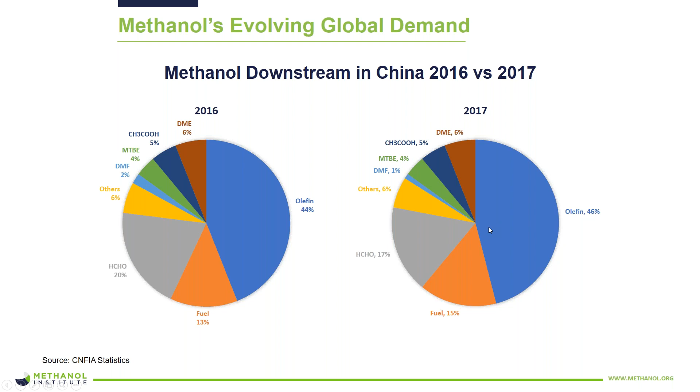Last year, China consumed about 70 million tons of methanol, which is a 13% increase over 2016. Olefins is the largest downstream, which accounts for 46%, and the second largest is fuel. If we consider all the fuel applications of direct fuel blending, DME, MTBE, as a whole, it accounts for 25% of the total consumption.

In the fuel applications, methanol as a direct fuel in gasoline blending, boilers and cook stoves is increasing rapidly in the past few years, which should have a promising future, and I will introduce in detail later today. While applications like formaldehyde, its market share in China is decreasing now, and the application of MTBE is also facing challenges from the Chinese E10 promotion policy nationally. That is why developing new downstream is important for all of the methanol industry.

Before this study, there was only very limited understanding about methanol fuel in the direct fuel category. Now, the development and discovery of methanol as a boiler and cook stove fuel also explains where the missing part of the methanol consumption in China goes in the statistics. Every year from past experience, around 7 million tons of methanol consumed in China did not have a specific downstream. So it's generally listed as a fuel or in the name of others. Now we have better understanding that the missing part of the consumption could be found in boilers and cook stoves.

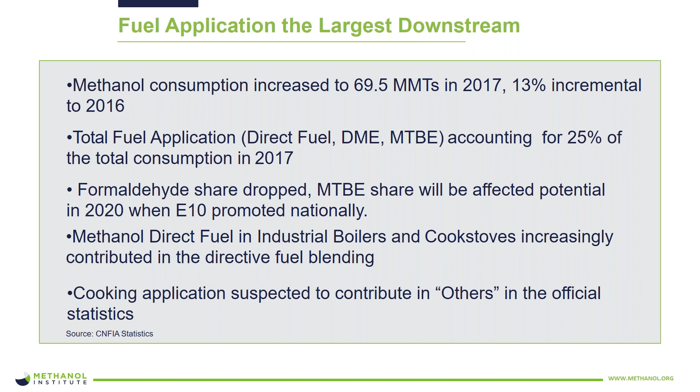Now let's move on to look at the boilers first. A methanol boiler is composed of a methanol storage tank, methanol supply systems like a high or day tank and a pump, a burner which is compatible with methanol fuel, and a boiler drum, which is similar to what can be seen in diesel or natural gas boilers.

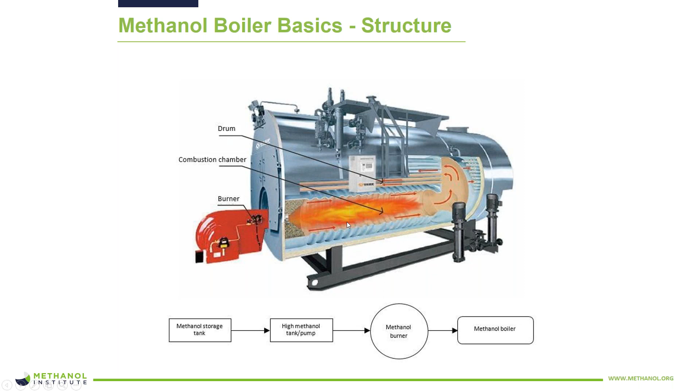An industry example can be found in a piano manufacturer in Tianjin, where a methanol boiler is used for heating and drying processes, in the right pictures. A large amount of the methanol fuel is stored in the underground storage tank outside the boiler room. When the boiler operates, the methanol fuel is pumped into the so-called high tank or day tank. Then the methanol fuel flows into the burner by gravity through the pump and the metering. Then it gets burnt to produce steam and hot water.

Now, many industries use them in applications for heat and steam, like food processing, pharmaceutical, and various manufacturing, with power range between 1 to 20 steam tons per hour. For the boiler power unit, China uses steam ton per hour to measure the output of the boiler, and 1 steam ton per hour is equivalent to 0.7 megawatts.

The fuel used in boilers can be neat methanol or methanol blends with methanol content over 60%. Generally, a 1 steam ton boiler consumes about 110 kilograms of neat methanol per hour. Such boilers can run 24 hours per day, 7 days a week. So the actual consumption can be very, very large. From our field investigation, we estimate that there were over 1,000 such methanol boilers in China last year, which consumed about 2 million tons of methanol.

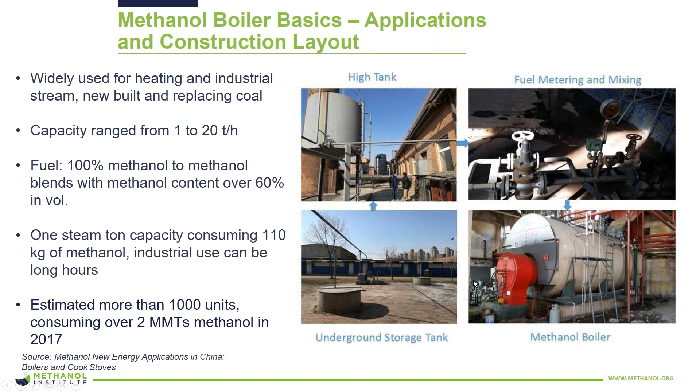This is largely due to the Chinese government's policy to ban coal in regions close to key and capital cities to prevent so-called smog weather, or the so-called blue sky protecting action. Most of the region is around Beijing in the north part of China and other key cities in the south part of China. Under such strict government policy, users do not have many choices. As we can see from the table, methanol and natural gas are the main choices used to replace dirty fuels like coal and diesel.

In the perspective of operational cost, I made two scenarios, low price and high price, for methanol and natural gas. The low price of methanol is the price found in the first half of last year. The low price of natural gas is the price for household purposes, which is government subsidized. The high prices are the prices observed last winter, when the coal banning policy resulted in methanol and LNG or natural gas prices reaching a very high record. The other prices of the fuel are average prices in the last year.

Through the calculations based on different heat values and thermal efficiency, we can get the actual fuel economics of different fuels in boilers. As we can see in the low price scenario, in the first and third column, methanol OPEX is slightly higher than natural gas. Such cases can be found in some regular conditions, like community heating. The natural gas prices, as I said, are government subsidized.

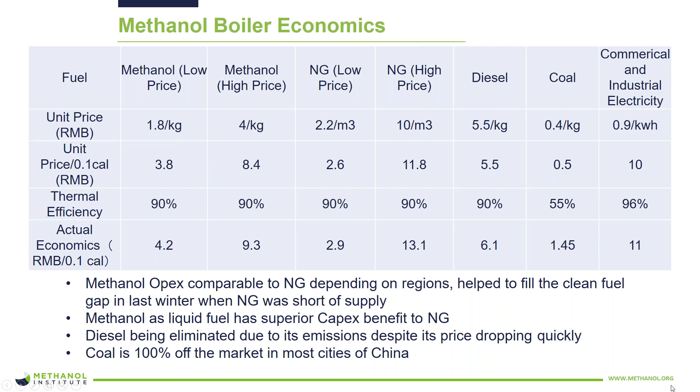But considering the capex, methanol is much cheaper than natural gas, either in the form of LNG infrastructure or the pipeline cost. In China, many companies cannot afford such infrastructure investment. If they don't use methanol, they probably need to close their business, forced by the environmental regulations. This explains why methanol has developed the market so quickly in the past 2 years, as coal and diesel cannot meet the required emission standard. Methanol is an economical and realistic choice.

From the emission point in this slide, as methanol does not have sulfur and gives better results on NOx and particulate matter (PM) emissions, either neat methanol, which is used in the LinJing boiler, or methanol blends used by the Jin Jing Da boiler, both show very good emission performance, meeting all the emission standards required by the Chinese government from the left columns, particularly meeting the latest Chinese emission standards, even in key regions like Beijing and Shanghai.

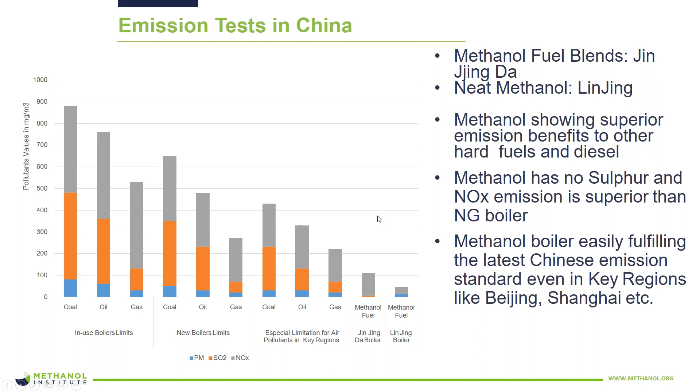It is also reported that methanol boilers have better NOx emissions than natural gas, probably due to the lower temperature in the combustion and less air intake. Now, the Chinese government is also looking at methanol boilers in a positive way. For example, the Ministry of Environmental Protection confirmed the emission standard of methanol boilers at the end of 2015 when methanol boilers were first introduced in Hebei province.

Previously, methanol boilers were only classified in the oil or gas categories in the Chinese boiler burner national standards. When updating the burner standards last year, the Boiler Burner Authority included methanol fuel and classified it in the liquid fuel category, with requirements on original emissions and design specifications. And this standard is to be effective by the end of this year.

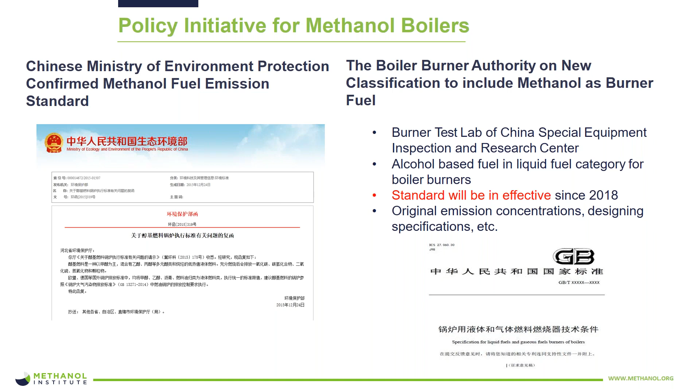Before this, a methanol boiler needed to be first certified as an oil or gas boiler, and then retrofitted to be compatible with methanol fuel. With these standards, the methanol boiler is a regular product, same as natural gas and diesel, which can be certified by the local authority. However, a boiler is related to many standards. The standards above are not enough.

From the fuel perspective, more work is underway as these new markets need standards to form safe practice. By using standards, methanol boiler technology can be trusted by the government from a regulation and inspection perspective, also reducing consumers' concerns on safety. Now, the China Association of Alcohol and Ether Fuels and Automobiles, also called CAEFA, is leading another two group standards drafting under the China Petroleum and Chemical Industry Federation, CPCIF. More than 12 companies participated in the drafting work, from boiler manufacturers, fuel suppliers, storage tank producers, as well as MI and MI member Methanex.

The first group standard is related to methanol fuel. It regulates the fuel into three categories, which are 50, 75, and 100% methanol by volume, as you can see in the right table. Other specifications include heat value, ash, sulfur, chloride, and nitrogen content, which can be used to exclude the addition of any unregulated dirty fuels into methanol. Phase separation is required to form a stable blend, and anti-corrosion performance is also required to prevent any boiler damage.

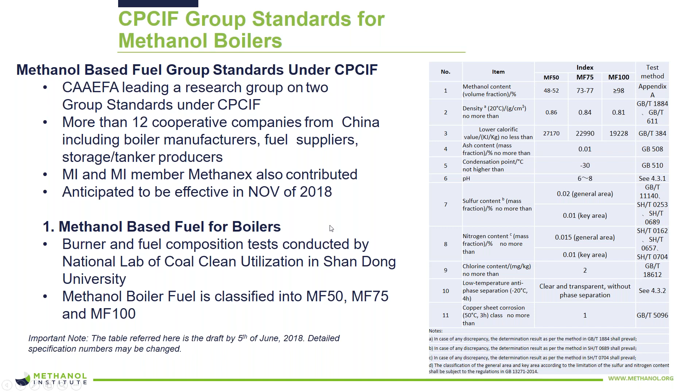The second group standard covers the storage and supply facilities of the fuel. It regulates the safety specifications where the fuel is stored, like the total volume and the safety distance between the storage tank and other buildings on the boiler site. It also allows the use of skid-mounted above-ground storage tanks, which is a faster way in terms of boiler construction. For example, the total storage volume should be lower than 150 cubic meters in general conditions and less than 20 cubic meters in urban built-up areas.

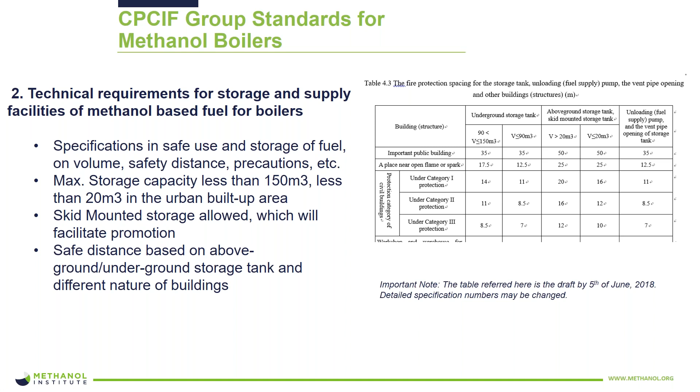Methanol also has better energy efficiency than natural gas, as the air intake of methanol is less than natural gas, and the air also consumes energy to be heated up. As China is the largest manufacturing country in the world, such applications should have great market potential.

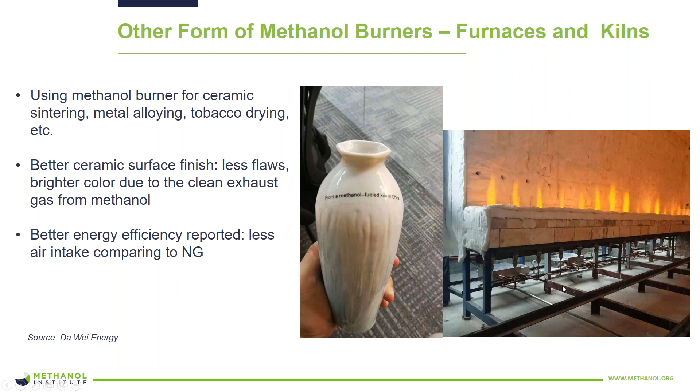Now let's move on to the cook stoves. Similar to other commonly used stoves, a methanol cook stove is composed of stove and liquid storage and pumping components. It has different forms according to Chinese cooking, like stir frying and steaming.

The methanol fuel is 100% methanol or methanol blends, sometimes with water, and the fuel is stored in a day tank or cylinder of small amount in the kitchen, and a large amount of the fuel is stored outside the kitchen. Liquid methanol is first pumped into the stove, gets atomized and vaporized, and then ignited to produce flame.

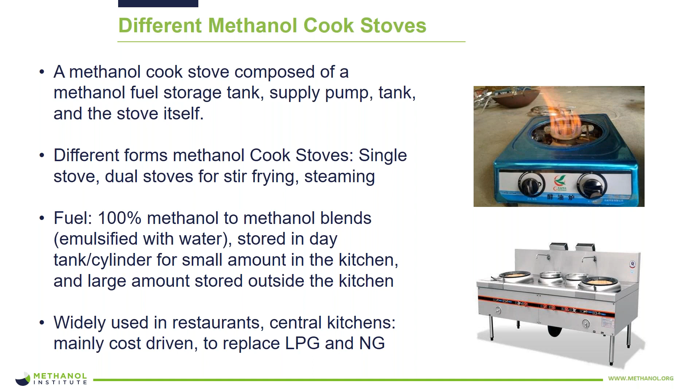Such cook stoves are widely used in restaurants and central kitchens in China, and mainly it's cost-driven to replace LPG and natural gas. In China, the methanol fuel in cooking is usually called alcohol-based fuel, complying with two standards, which were produced by the Ministry of Agriculture back in 1997.

There are millions of restaurants in China. Through our field investigation, we found methanol as a cooking fuel is in almost every city in every region of China, consuming around 5 million tons of methanol last year.

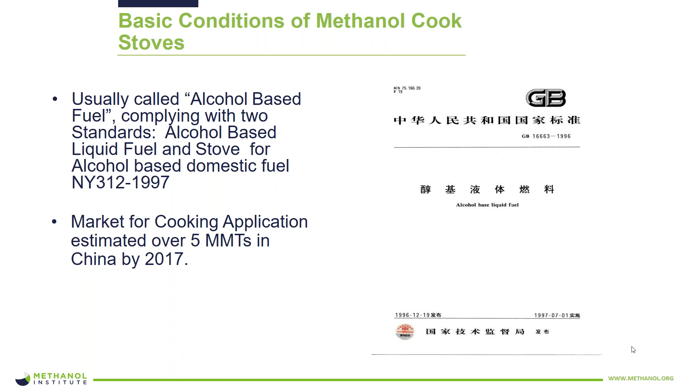From the economics study based on the heat values and thermal efficiencies of the cooking fuels, although methanol is more expensive than natural gas from the pipeline, it's cheaper than LPG in OPEX. But the supply of natural gas is very limited to the restaurants in China.

Natural gas is usually associated with very high infrastructure cost, like the pipeline connection fee, which should be paid to the local natural gas supplier. As a liquid fuel, methanol has superior capex benefit and is cleaner than diesel and coal, which are not allowed to be used in China.

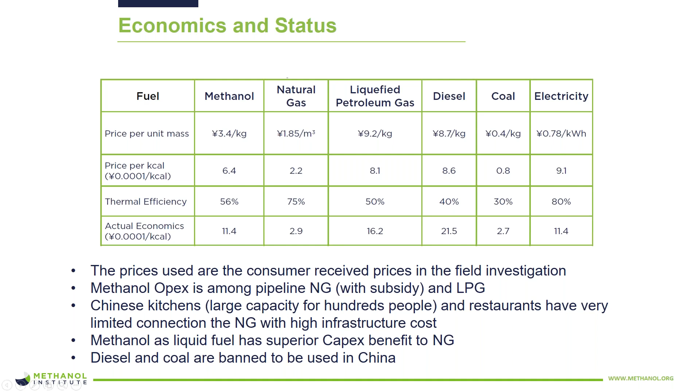The government has different attitudes for methanol in cooking applications from region to region. Regions like Tianjin, Gansu, Shanxi, Shaanxi, and Guilin issued local policies to support methanol cooking fuel, but cities like Xiamen don't. These differences in policy depend on how safely the methanol fuel is distributed, local cooking fuel supply conditions, company to government engagement, and safety history, whether any accidents happened or not.

Although methanol in cooking has a wide coverage in China, there are some safety risks in such applications found in our study. For example, accidents reported of humans misdrinking methanol fuel as liquor in restaurants, fire accidents due to unsafely installed storage tanks on the rooftop of the kitchen, and lack of emission tests of unburned methanol and other pollutants like formaldehyde.

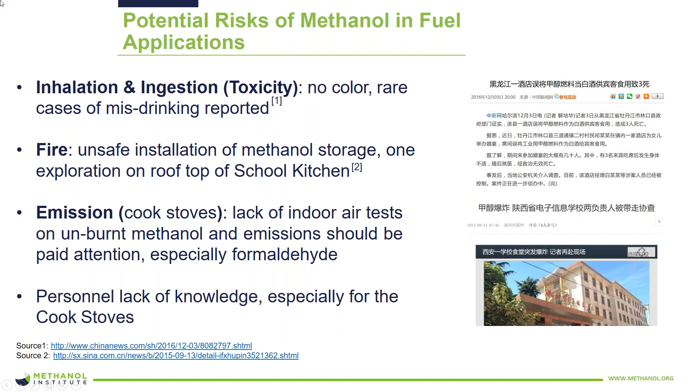That's why MI is trying to work with stakeholders in China to produce best practices like electric control and steel cylinders for indoor fuel storage, flame sensors, and alarms. And all this can be connected by Internet of Things technology and remote controlled.

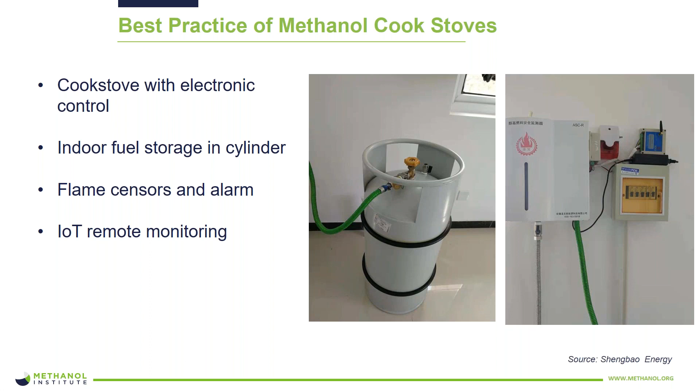Okay, that leads to my final slide. For more information, MI officially released an industry insight report on methanol as an industrial boiler and cook stove fuel this year. It's free to download through our website, and you are also welcome to search more information such as MI's safety manual in multiple languages and technical bulletins from the website.